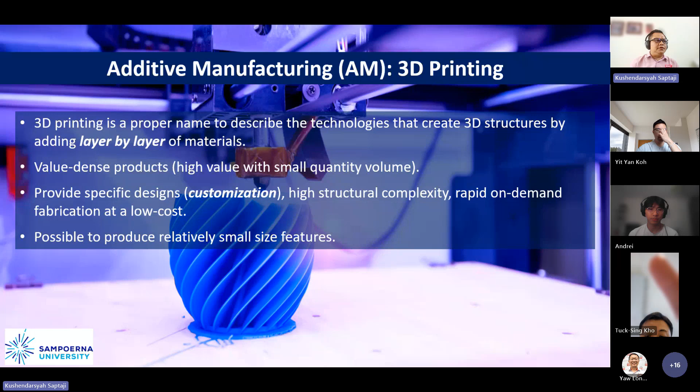3D printing becomes more important because this is part of the Industrial Revolution 4. We can see here there are various technologies related with Industrial Revolution 4, and one of them is additive manufacturing. That's why now this technology is getting more interesting and also growing very fast.

The process of 3D printing is basically, as we can see in this simple explanation, you design a product using CAD software. Once you approve this design, you can convert it into an STL file, and then process it with the 3D printing process to become the product.

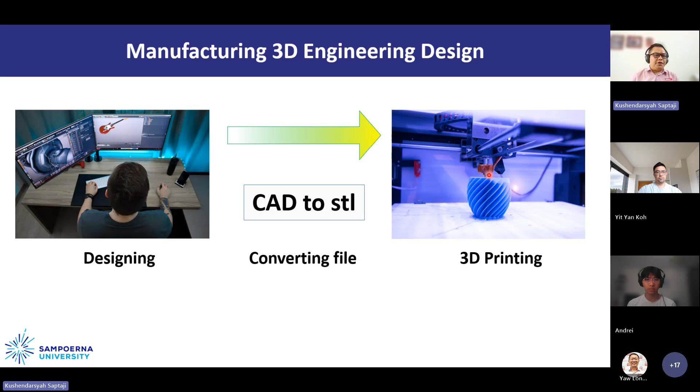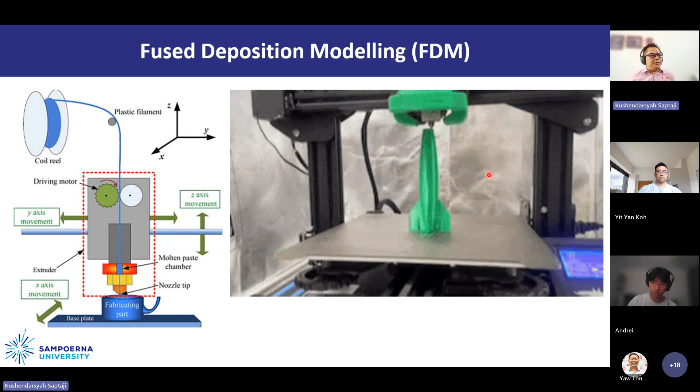There are many 3D printing processes available, but I will highlight only two here. The first one, already common for us, is fused deposition modeling, or FDM. In FDM, basically we have a filament, normally plastic filament, which is rolled and then passes through a heating chamber inside the extruder, where the plastic melts.

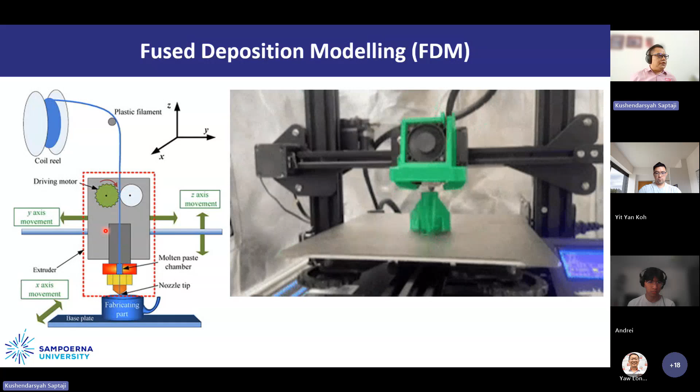This creates a product in 2 dimensions. Once it's finished, the base plate will move, or the nozzle will move up. This is, like I mentioned, a layer by layer process.

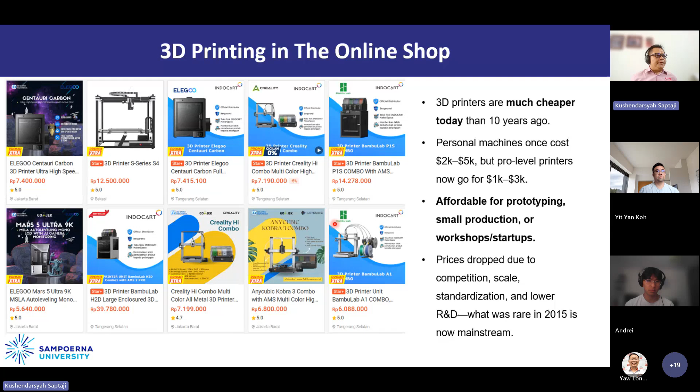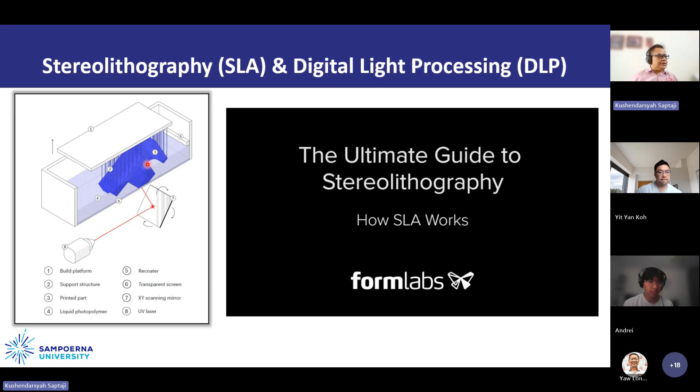The second process that I want to show is stereolithography, or SLA process, which is similar to digital light processing, or DLP. In this process, basically we use laser or light from the bottom, and the raw material here is resin, and the platform is at the top. So once one layer is finished and solidified, then this base will move up, and then layer by layer is created inside the resin. You can see the illustration in this video.

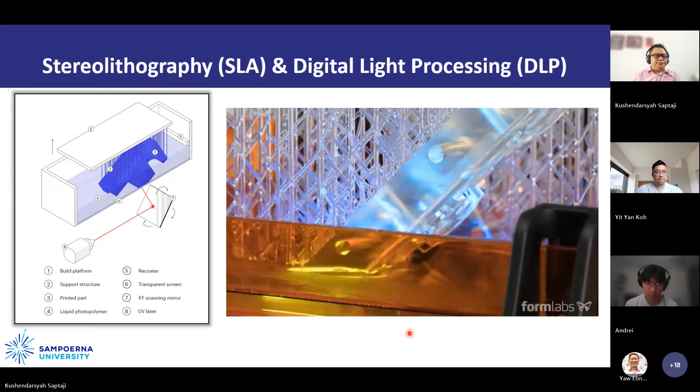Now the resin 3D print is also quite common. It's available in desktop size, so it's again an affordable machine. Here I will show some applications of 3D printing.

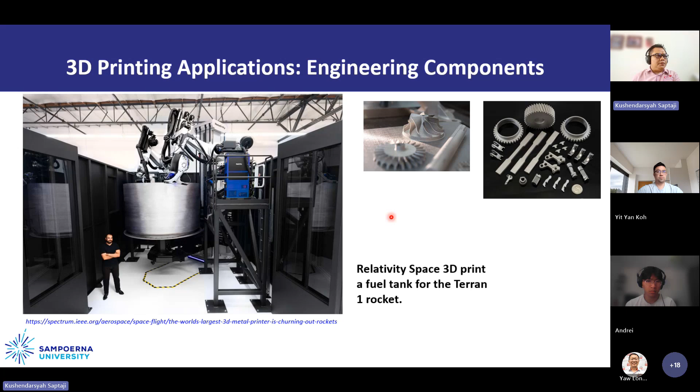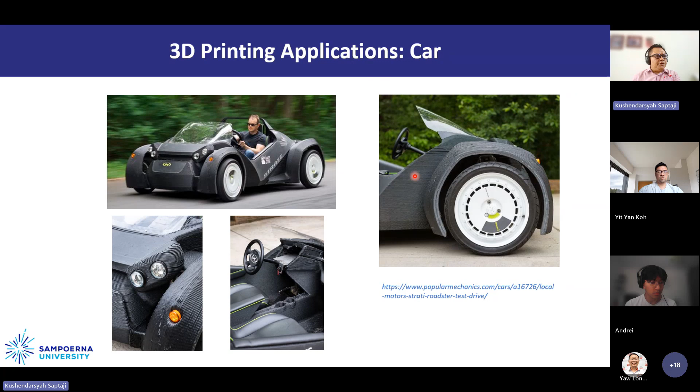The more important application of 3D printing in helping human life is to make implants. Here's some examples of 3D printed products. For example, here is the titanium alloy implant for the skull, and then this is for the pelvis. The process used here is direct metal laser sintering, where the raw material is basically a powder of metal, and it will be layer by layer solidified by using laser.

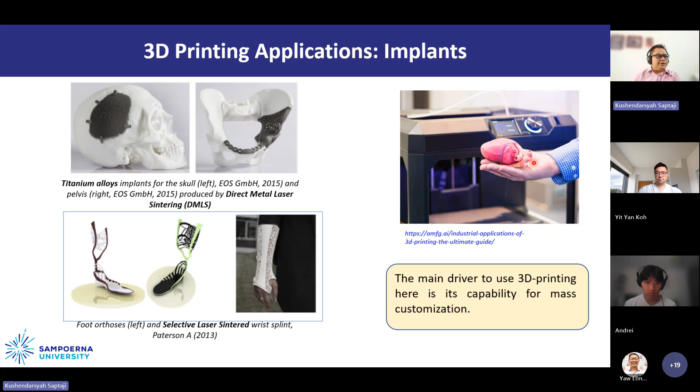Some other examples here for orthosis, and then for wrist splint, and there's also technology trying to develop 3D printing for the heart, like this. Yeah, still ongoing.

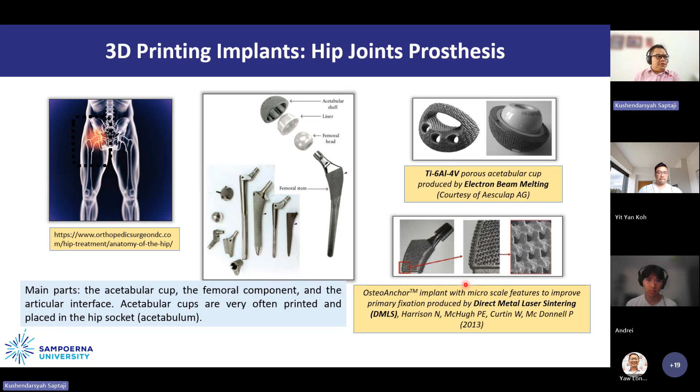Some other example for joint hip prosthesis here. Most of the components here are made from 3D printing. For example, the cup using electron beam melting. And here is part of the implant, the femoral stem, produced by direct metal laser sintering also.

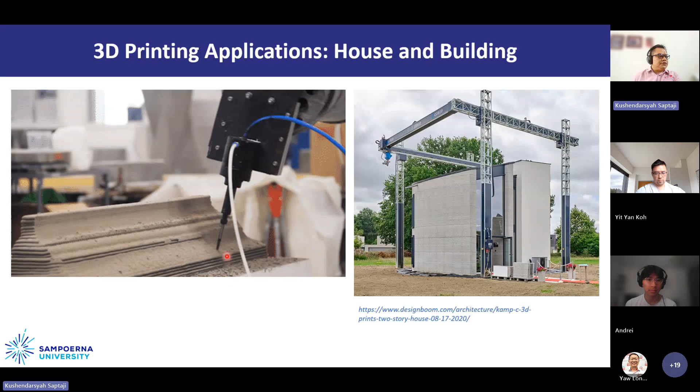3D printing is also now used to build houses and buildings. It's a combination of mechanical engineering with civil engineering. I think in Singapore they already built one.

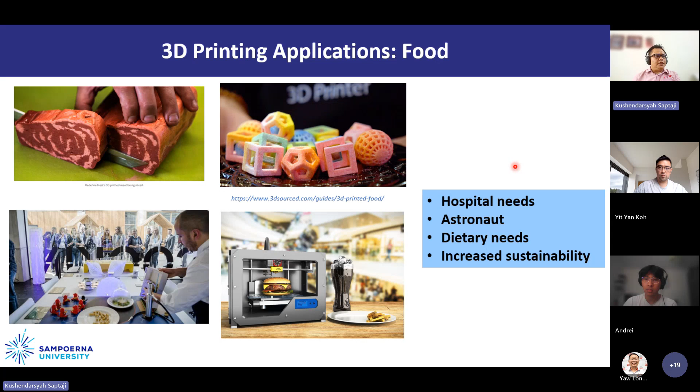Maybe in the future we can even have a 3D printer at home that can print our own food. Mainly the application of 3D printing food now is for hospital needs, where we need to control certain amounts of mineral or vitamin for the patient. For astronauts, they use 3D printed food, and now many applications can be used as well.

Next, I will show some results from our research already published related to 3D printing technology. The first one, we have done this research where we basically use indirect additive manufacturing to produce a lumbar spine model. This model is used for practice for the doctor, who before going to the real surgery can do some practice using this model.

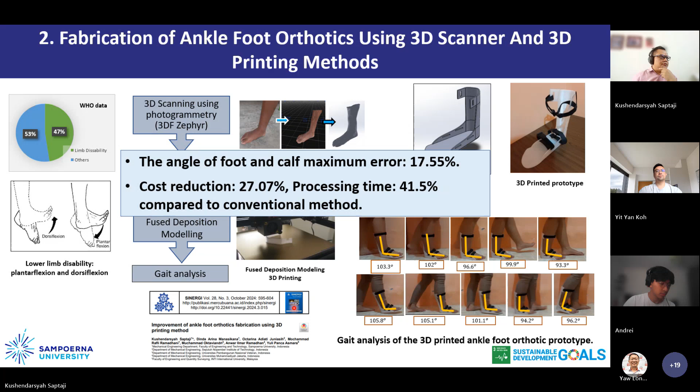Once we get the 3D print prototype, we perform the test using gait analysis. From there, we conclude that the angle of foot and calf maximum error is about 18%, which is good. With this process, we can reduce the cost compared with the conventional method using a cast normally, and processing time can also be faster, by about 41.5% compared to the conventional method. This work has also been published in a Q4 journal.

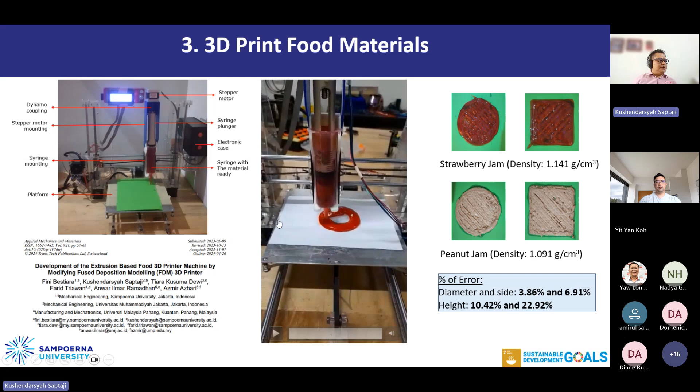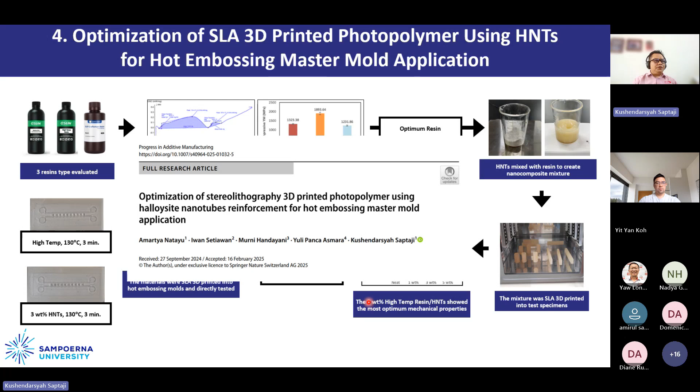So that's all about the 3D printing technology research that we have done related to the 3D printing process. Now we move to the next topic: after 3D printing, is there any 4D printing, or 5D printing, or 6D printing? This question often comes up when we talk about 3D printing. So basically, what is 3D or 4D printing technology?

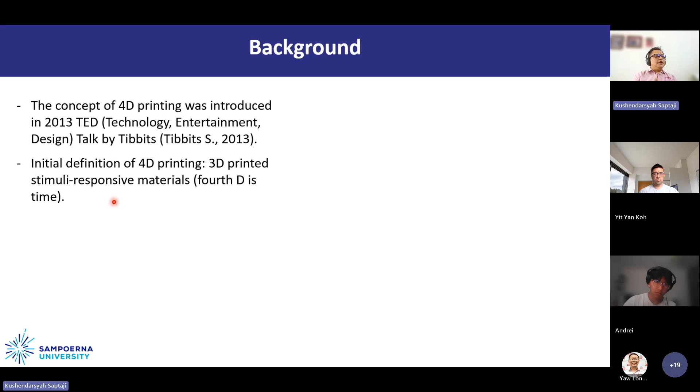In a certain period of time, we can modify or have a different structure than we already created before. So the concept of four dimensions now has involved the shape, the properties of the material, or the functionality of the 3D printed object that can change over time under external stimuli.

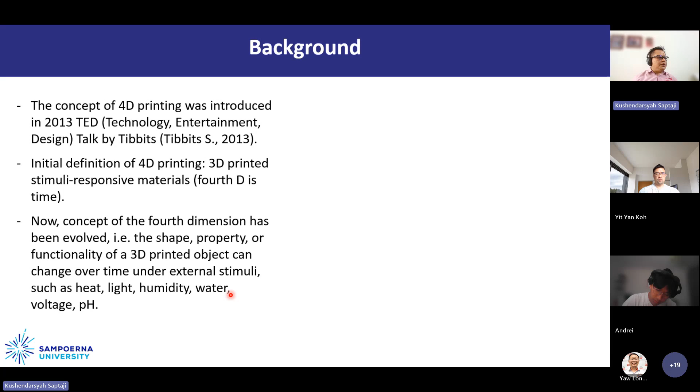There are many stimuli that we can use, such as heat. When we heat up that 3D printed structure, it will change. Or we can use light, humidity, water, voltage, and pH. So many external stimuli that we can apply. So basically the concept is like this.

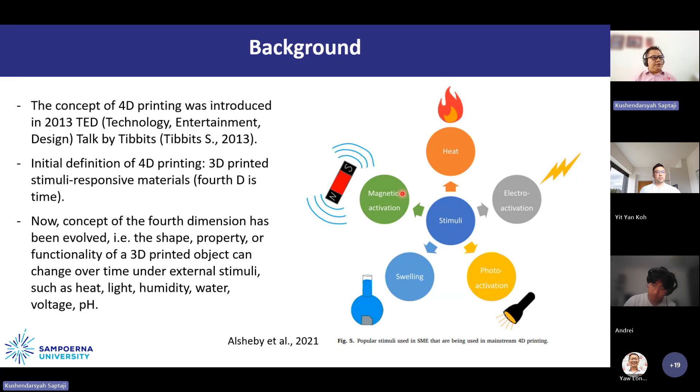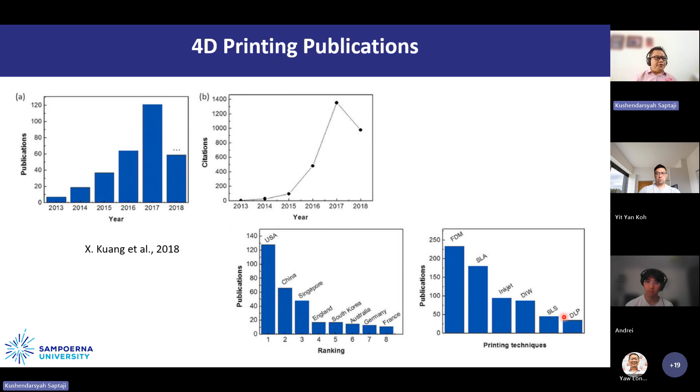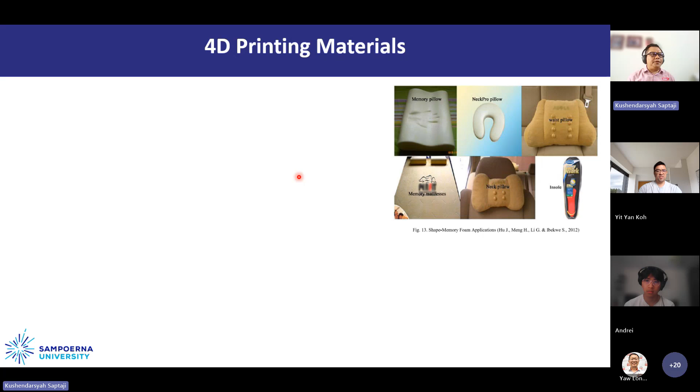So let's now move to the materials - the first thing you have to consider when you want to apply 4D printing. Basically the material is similar to a memory pillow, if you know about memory pillows. So basically the concept is similar to this memory pillow.

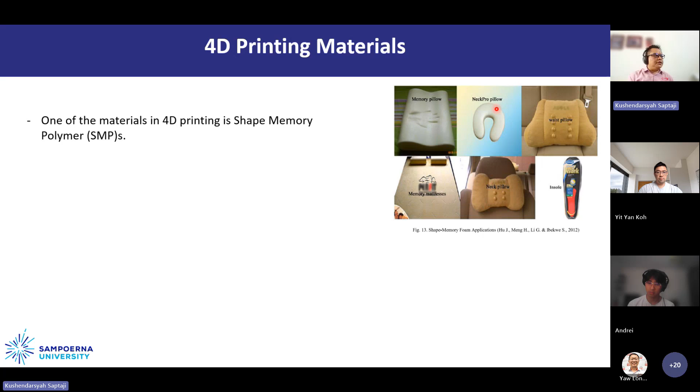When we use FDM as the printing technology, normally we use polymer material. One of the polymer materials you can use is shape memory polymer, SMP. SMP is one group of polymers that can change to a temporary shape and return to its initial shape under external stimuli. The external stimuli, as I mentioned before, can be temperature, light, electric field, magnetic field, pH, or ions.

Compared with SMA, or shape memory alloy, which is made from metal, and SMC, shape memory ceramic, SMP has more advantages. Because this is polymer, normally the deformation is larger. We can also adjust the glass transition temperature, which is normally below 100 degrees. We can also use different actuating modes, and this is also lightweight, because polymer is lighter than metal and ceramic.

So the popular SMPs normally used - the first one is polyurethane, and also PLA, which is the basic filament we use in daily life. If you work in 3D printing, normally PLA is the common material to print your product. While for SMA it's nickel titanium, or nitinol - one of the shape memory alloys - or copper, aluminum, nickel.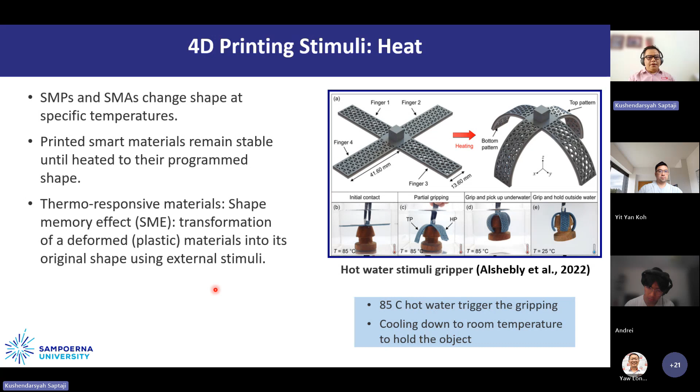From these explanations, there are many applications in industry for 4D printing, like in biomedical for drug delivery, for tissue engineering, for biomimetic applications like soft robotics. Many researchers are doing this now, like this gripper for soft robotics. For microfluidics also we can use it, and for medicine also we can use the printing.

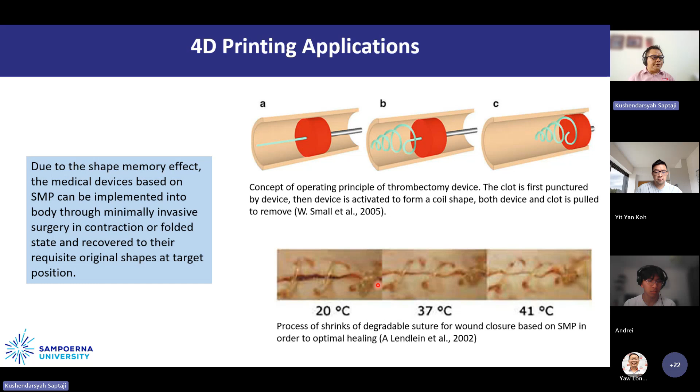Okay, now I'm going to discuss some of the research that I have done with my students here. Some already published and some in the process of publication and submission, related with 4D printing.

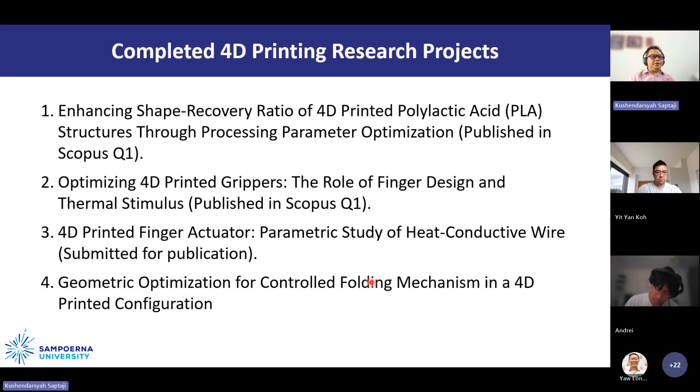The first work is related to optimizing the parameters of 4D printing for PLA using different parameters. This is the design of experiment that we planned for the 3D printing parameters. We differentiate the infill density at 50% and 100%. We want to see the effect of infill density and also the printing speed.

The parameters related to 4D printing are the effect of thickness, deformation temperature, and recovery temperature. So after we apply heat, we want to recover the sample back into the original or initial shape.

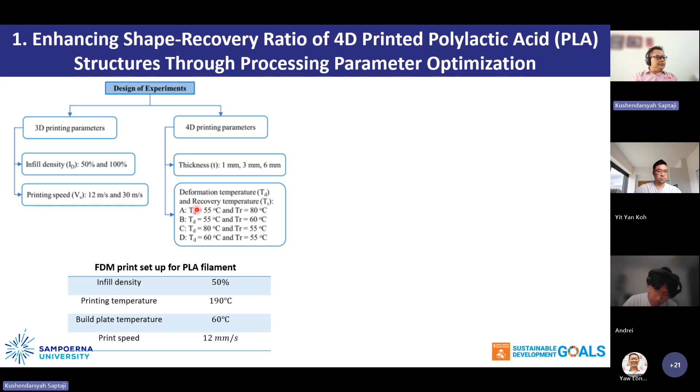This is the parameter, and this is the specimen that we created. We created an N shape or semicircular shape like this for different thicknesses and for different printing parameters, which is the infill density and also the printing speed.

After that, this is the oven we use to heat up the sample. So this is the flow of the experiment: we print the specimen into a semicircular shape, heat it up inside the oven, and then apply a load at this temperature, which is the oven temperature, with 5 kg load. We expect it will go back to the original flat shape. After that, we recover the sample by heating it in the oven at temperature TR, and measure what the final shape is, whether it goes back to this shape or not.

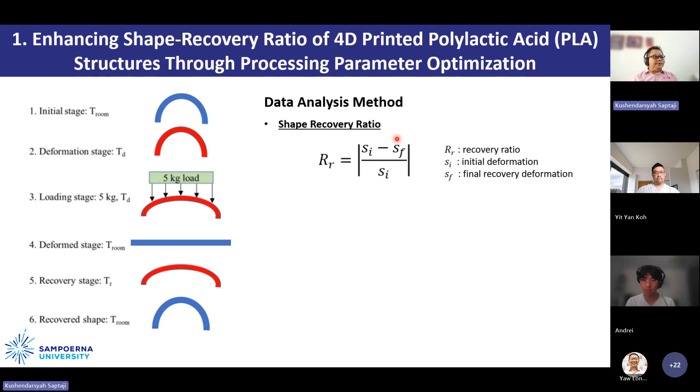So then we measure the initial deformation and the final recovery deformation as the recovery ratio, and we perform the ANOVA analysis to get the optimum parameter.

This is the plot showing the recovery ratio with respect to time. We measured at different times for different printing speeds. This is for 50% density, this is for 100% density, and this is the specimen after the deformation and loading stage - it will look like this. Not all samples are straight; there's still some curve here.

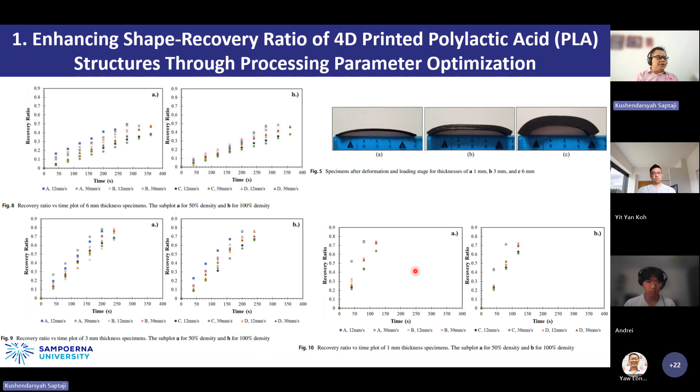This is for 3 millimeter thickness, this is for 6 millimeter thickness, and this is for 1 millimeter thickness. We measured the recovery ratio for each time point and each thickness, and for different printing parameters. From here, we found that the PLA structure has optimum shape memory properties with the combination of high recovery temperature (TR), faster printing speed, lower density, and smaller thickness. At smaller thickness, the recovery is better compared to the thicker sample.

This work has also been published in Progress in Additive Manufacturing only 2 years back.

The second research that we conducted related to 4D printing is we created a 4D printing gripper. We wanted to know the effect of the finger design and also the effect of thermal stimuli. So this is the flow of the experiment that we conducted.

We create the 3D design of the finger, then print it and apply the heat stimuli using hot water. Then we measure the bending of this finger, and we need to find which design gives the highest or best bending. After that, once we get that, we create the full gripper design and test it to grip different shapes and different materials of objects.

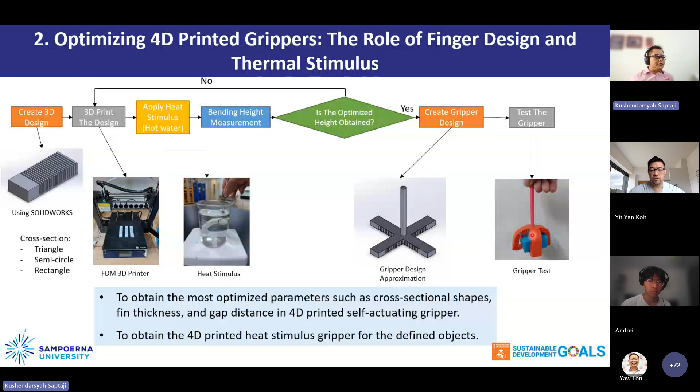The first step we performed here is comparing 3 different cross sections: triangle cross section, shown from the side view where we can see the cross section; semicircular; and rectangle cross section. From this, we decided that the rectangle cross section is the best, so we continued with the rectangle cross section for the next research.

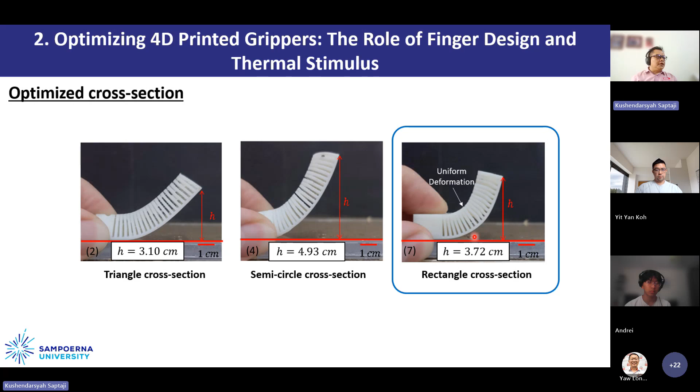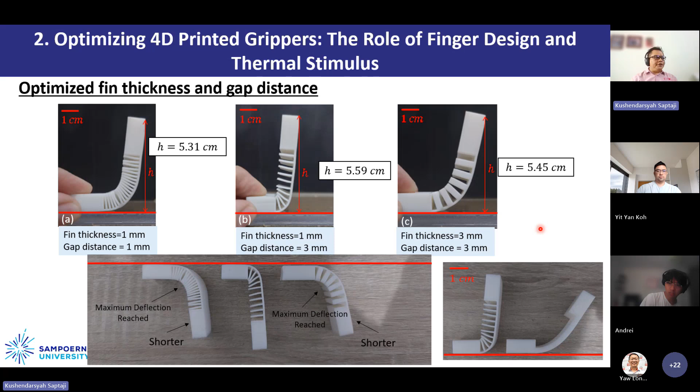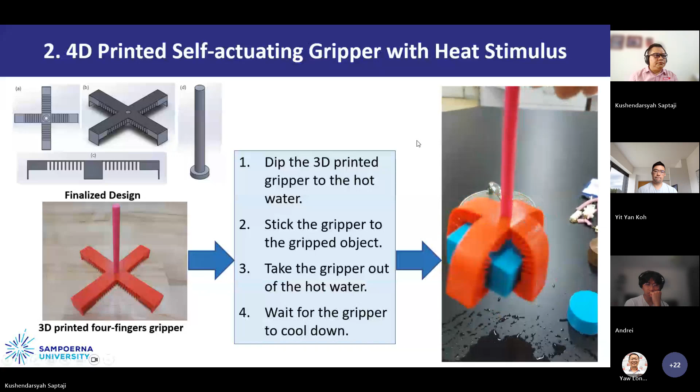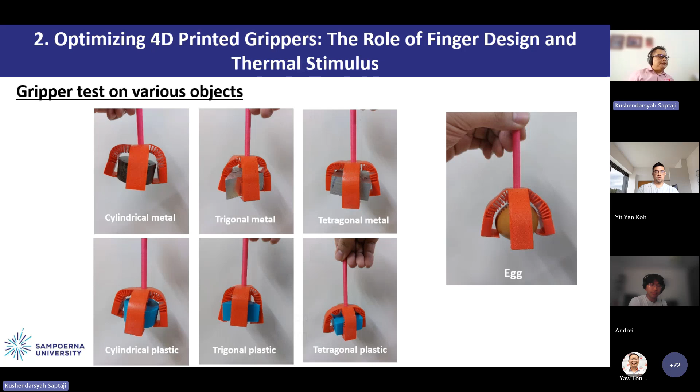The next result I want to show is from about 1 year ago. Now we want to apply heat through the conductive wire. The previous one used hot water; now we want to apply heat stimuli using the conductive wire.

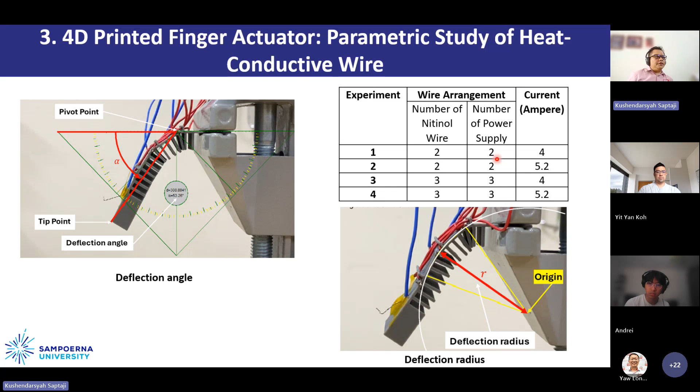There are 4 experiments we performed, combining different numbers of wire and number of power supplies. This is one result for experiment 3, where we use perpendicular Nitinol wire with 3 power supplies, so each power supply applies to 1 wire, and we use 4 ampere. This is the initial condition.

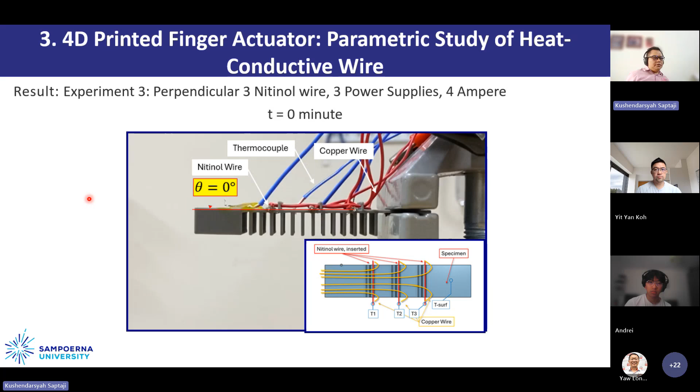This is the thermocouple, this is the copper wire. After 1 minute we apply the current and it starts to bend. After 2 minutes it bends even more. After 3 minutes, 4 minutes, and we stop at 5 minutes. Then we measure the deflection angle and also the radius. This is how we perform the test.

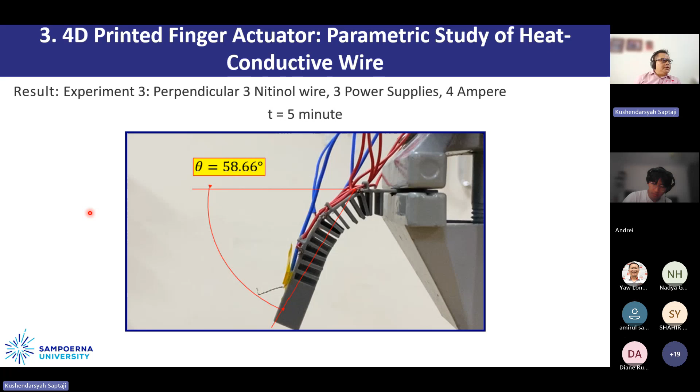After that, we collect all the data for different times and different experiments, and plot the temperature with respect to time for different sets, experiment 3 and experiment 4. This is the temperature at the wire: T1, T2, T3, and this is the deflection angle.

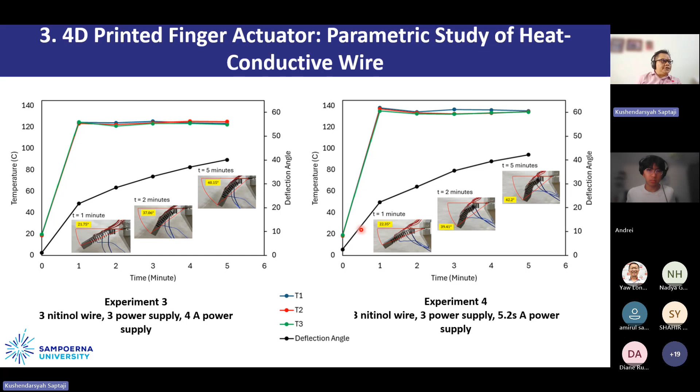Again, we were curious whether the fin gives an effect or not. Without the fin, the deflection is quite high, but the shape bends only at this one point, while having the fin helps create some curve here.

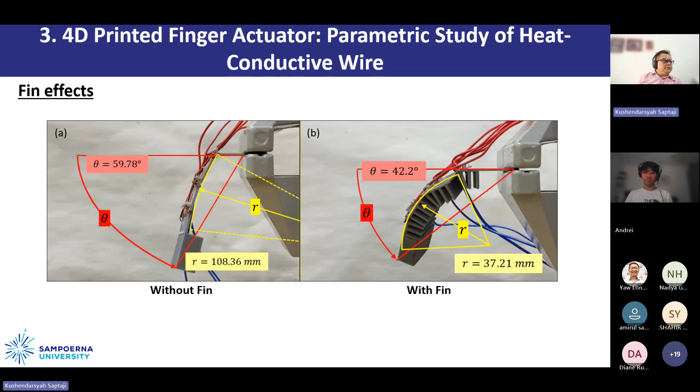We also tried changing the setup, making the fin face upward, and compared it with the downward fin. You can see the upward fin is not as good as the downward fin in terms of the deflection angle and the radius.

From here we conclude that the optimum parameters to achieve the best deflection are a current of 4 ampere with 3 wires and 3 power supplies, each wire connected to 1 power supply. The fin also provides better deflection compared to without fin. This result is now in submission, and we are still waiting for a response from the journal.

So this is the last one that we just finished. We tried to use 4D printing to create a package, a small package, and we tried to control the folding mechanism of this design. The final target is how to make something like this as a package, for example in the medical industry. Basically, we performed a fundamental, simple shape like this.

So the objective here is to measure how big the angle of this deflection is. We apply the conductive wire in this bending area.

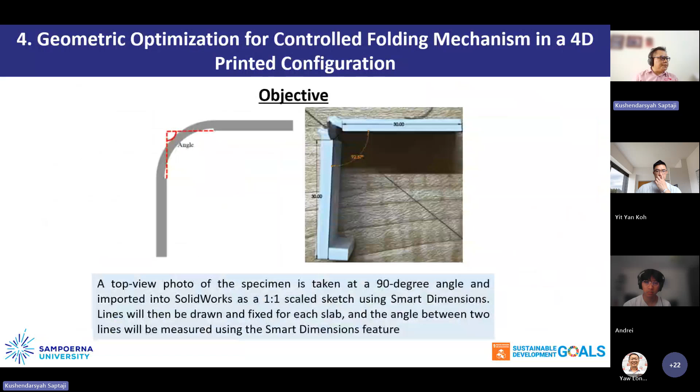This is the setup that we use, this is the top view. Basically we have a power supply, and we connect the power supply to the nitinol wire here. This is the specimen.

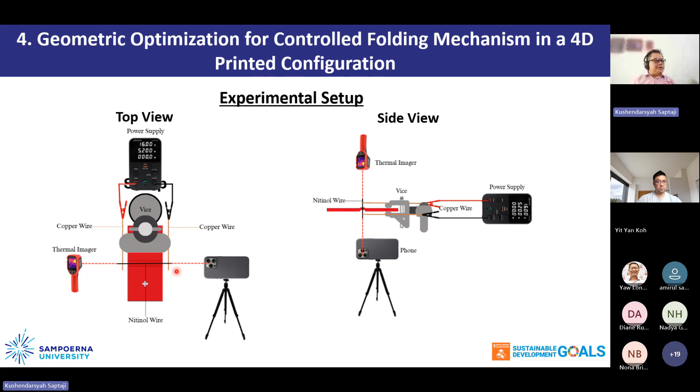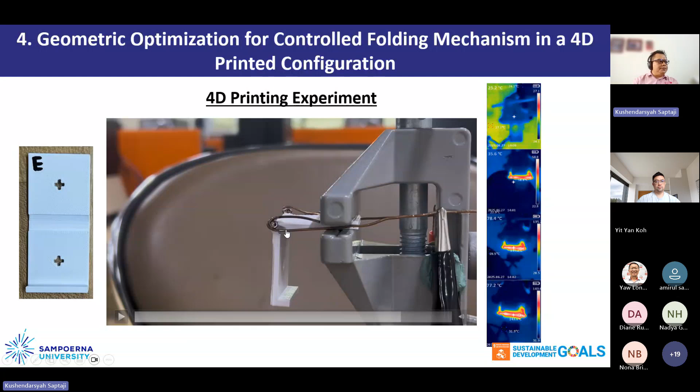From there, we measure the angle, the deflection, for different parameters. Some of the specimens are still tearing, as you can see in this slide, there is some tearing in the bending area. Some specimens, maybe because they were too thin, tore and got damaged. But some show good results.

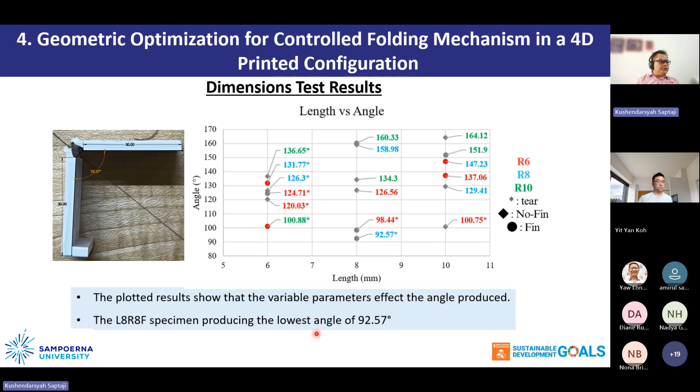Then we can conclude that with length 8 millimeters and radius 8 millimeters, with fin, it produced the lowest angle, which is about 92 degrees.

This is some result that we already have from this work. We can conclude that this dimension shows a good result compared with other dimensions. We still need to perform the long-term cycling test, to make sure that it is repeatable.

Okay, I think this is the end of my presentation.

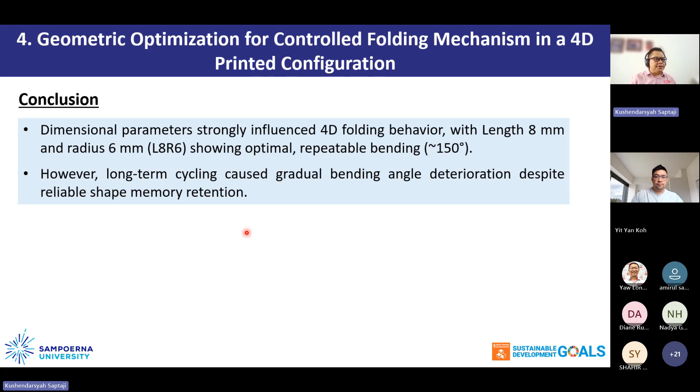Before I end, I want to give some summary about 4D printing technology. With this technology we can save fabrication costs, because now you can combine different shapes in one process, and by applying the stimuli you can also change the shape without additional mechanical force. This can also simplify the fabrication process and the assembly process, and you can combine this with different materials. For example, some are SMP and some are not SMP, so you can see the effect of the combination of SMP and non-SMP material in order to improve, for example, the structure or the shape-changing mechanism of certain products.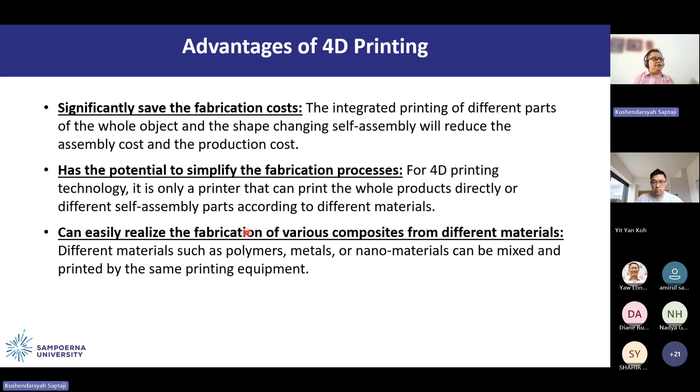Thank you, Professor Saptaji, for your insightful sharing. From this presentation, we realize that today's discussion highlighted the evolution from traditional 3D printing methods to the emerging frontier of 4D printing. We also explored real-world applications in automotive, healthcare, and even food, as well as some research breakthroughs in orthotic spinal fabrication or photopolymer optimization, as shared by Professor Saptaji just now.

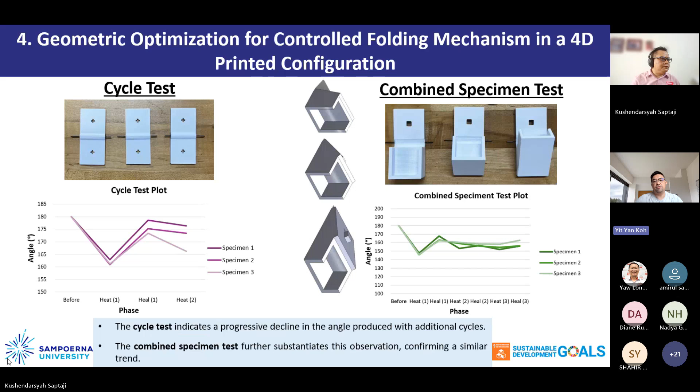From this presentation, we understand that what stands out is how 4D printing, with its smart materials and dynamic adaptability, is not just an extension of 3D printing, but looks like a paradigm shift, opening doors to responsive, sustainable, and multifunctional designs. The future of manufacturing is clearly moving towards intelligence as well as adaptability of 4D printing.

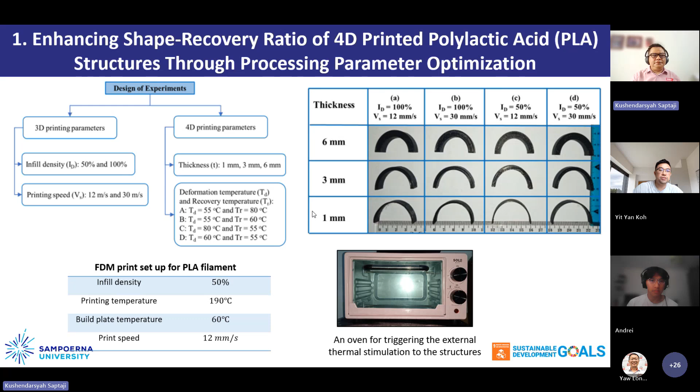Some materials will have two stimuli that can be applied together, but so far what I have read and found in the literature is that normally they apply only one stimulus. But there's a possibility we can apply both, for example heat and light, or heat and pH. So far I haven't found this combination in the literature, but maybe we can try this in the future.

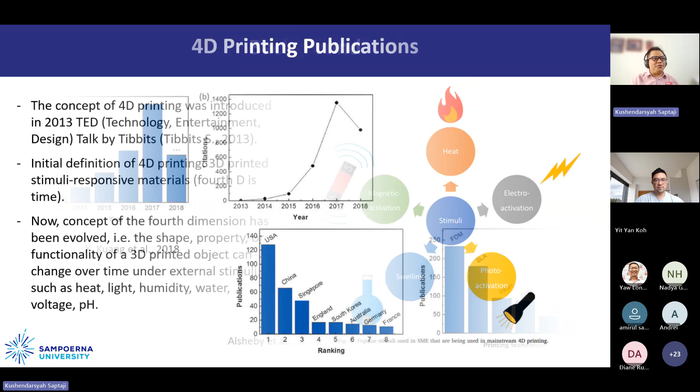This one I don't know. So far I've only reached 4D printing; I haven't found anything about 5D or 6D printing. But normally if we talk about axes in the process, like in machining we have 5-axis machining, perhaps there's an argument that 4D printing basically has 4 axes of printing—X, Y, Z, and maybe rotation. So in terms of 5D printing, there might be some understanding using the 5 axes, but in terms of additional stimuli, I don't know about that yet.

Well, listening to your explanation, it came to mind that in earlier days I read something about self-healing materials. I'm not sure whether there will be something for 5D or 6D—it could be something in the future. But self-healing is also included in 4D printing because the 4D is time, so it heals over a period of time. Yeah, but we don't know.

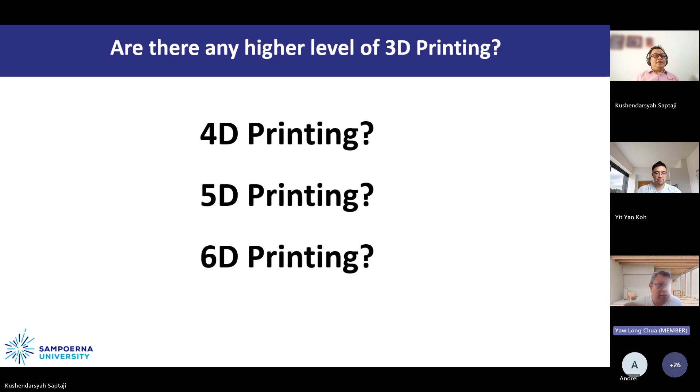I've seen some examples of applications where you can actually do gripping and all this. Apart from those things, where else can we actually use 4D printing in your opinion? Because in 3D printing I see some food applications, some applications in medical. So where else can we use it?

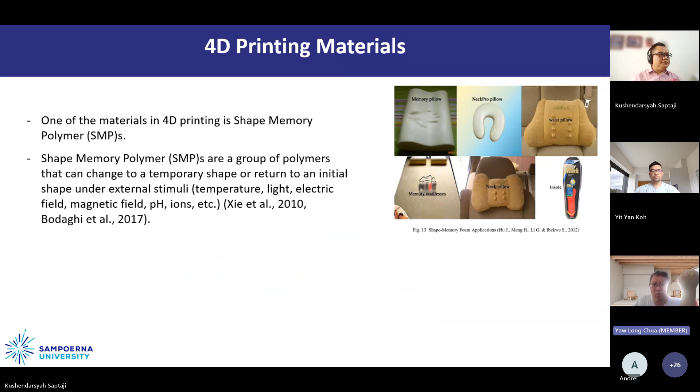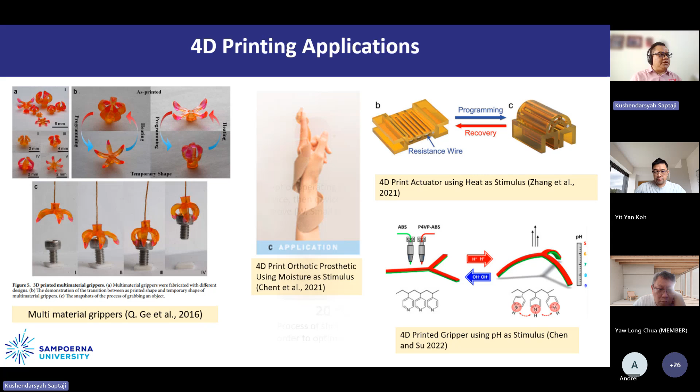The most research performed for 4D printing is the gripper, as you mentioned. But it can also be used for prosthetics, for the medical industry. I don't know yet more specifics of other applications, but mostly the reference is about this gripper mainly.

But it can also be used for microfluidics, for example to analyze milk - this is one example, to check the food inside a container. We have indicators or sensors using pH stimuli, where we can check whether food like meat or milk is already expired or not, by having a color indication. So we can use it for the food industry to check expiration or availability using pH stimuli, something like that.